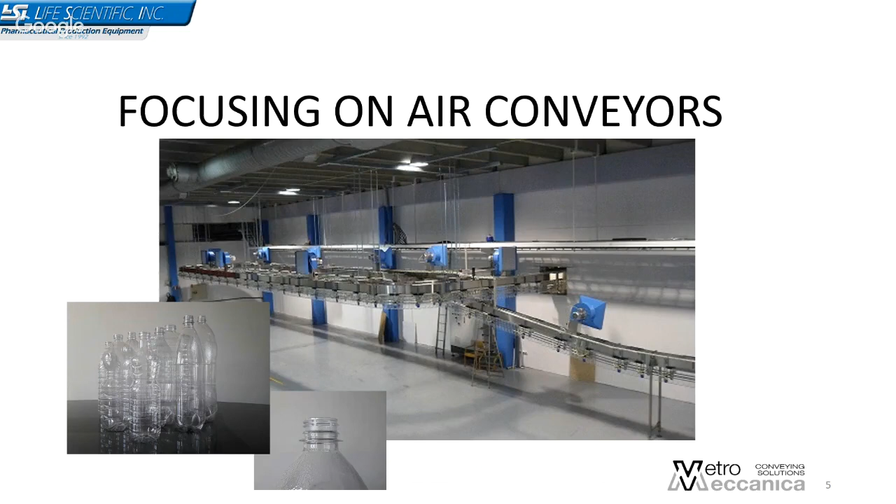Second slides are examples of the air conveyors. On the left, you will see these big curves. This allows bottles to go up and down with different levels in a building, for example.

And our air conveyors are completely made in stainless steel. They are very rugged construction, and we have a flexible modular design. This means that we can adapt our air conveyor to your requirements, to your needs, and to your building.

And we developed during our years a special system with every repeated section and module, every time customized, but ready to be customized in our stock. That means that the main frame of the air conveyor is already built in our store magazine, and we can customize the air conveyor with the bottle we have to run.

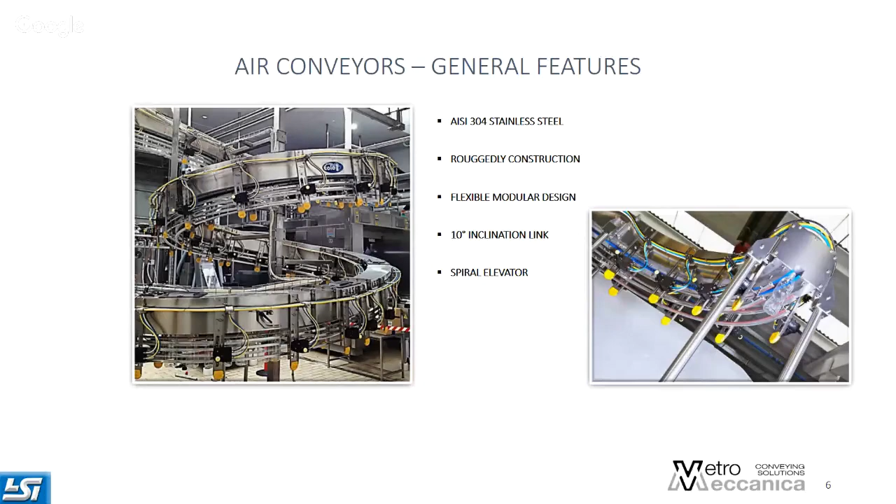Second slide. Okay. Apart from the hardware of the air conveyor, our main feature is the software we install on the air conveyors. We developed this software during the years. We modified, we upgraded, we did as much as we can to help conveying bottles very weak and very light.

As stated, it continuously checks the air conveyor functioning, and thanks to the bottle sensor, it assures a full control of bottle status: missing, moving, and accumulating. Because one of the main scopes of the air conveyor is connecting the blow molder with the filler. But the second and most important feature is creating buffer and creating accumulation.

That means that we calculate the exact length of the air conveyor in order not to stop the blow molder machine. So the air conveyor will be long enough to have the right buffer between blow molder and filler, to empty the oven of the blow molder and to have a minimum accumulation to give the complete line the right efficiency.

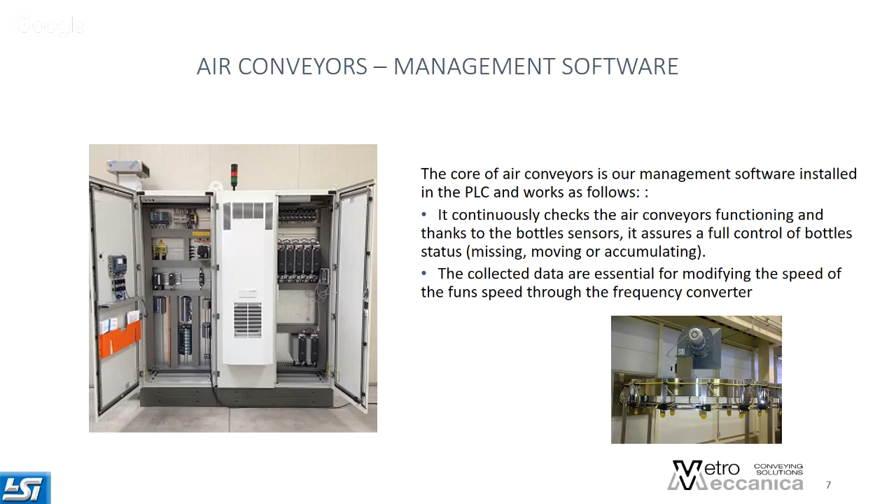This means that on the air conveyor, we have this blower fan that pushes air inside what we call the omega channel, but inside the electrical control cabinet, we have these frequency converters that can modulate the speed of the blower fans in order to increase the speed when we need to increase the speed, and to decrease the speed when we are, for example, in a static situation.

Key points: adaptive speed, as I told you. We have different conditions in an air conveyor line, so we should adapt our speed to the different conditions of the line. During the years, we have also developed this low pressure logic. It's included in our standard software because we are able to use this low pressure logic in order to avoid shock among bottles and to spare energy also.

For example, we have static situations during production, and with our photo cells on the line, we are able to freeze the situation. It means that if the blow molder machine or the filler machine are stopped for any reason, we are able in a couple of minutes to freeze the air conveyor situation and to stop all the fans in order to spare energy.

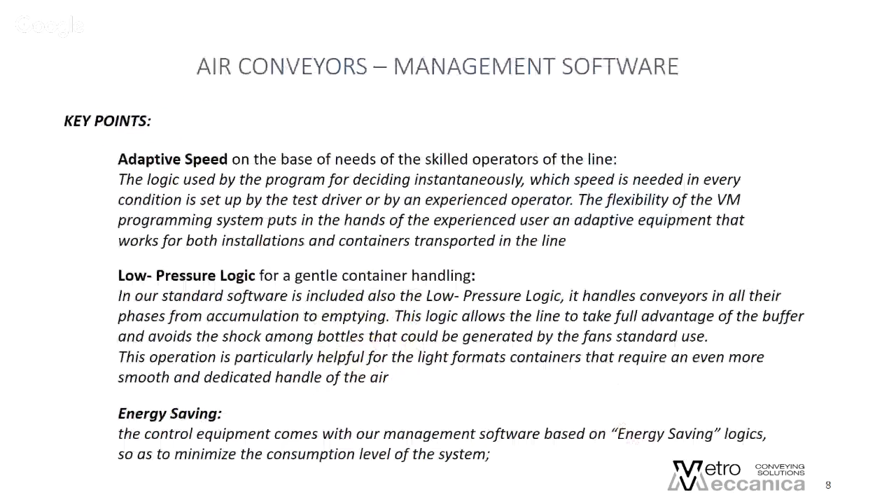Body guide. As I told you, we can run on the air conveyor different bottle formats, small ones, big ones. We need body guides, and we need to adjust these body guides. You can do this adjustment in different ways. We can have a manual adjustment, but it's not so frequent.

We can have a pneumatic adjustment with simple cylinders, and we can have this EMD, Eolo Moving Device, which is patented by Vetromeccanica, which allows infinite positions on the air conveyor system.

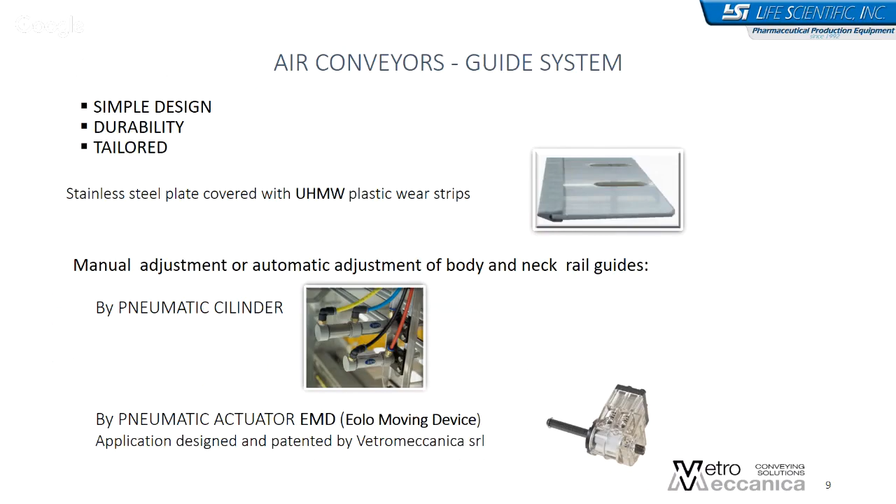You can see in the pictures, in the larger picture on the right, our system. This is specifically developed for the air conveyor. It's patented, and it's mechanical and pneumatic. This means that it's very simple with a very low energy consumption, because it works like a cylinder. Our competitors on the market, to do the same thing, utilize an electric actuator. But electric means using energy, power, and it's very delicate, because as you can imagine, in

for example, a filling company, you have very bad environmental conditions. You have a wet area, for example. You can have sugar, you can have steam. Our EMD can always work because it's plastic and because it works with pneumatics and with air only. We don't need any circuit, any electricity. So it's very, very rigid and robust.

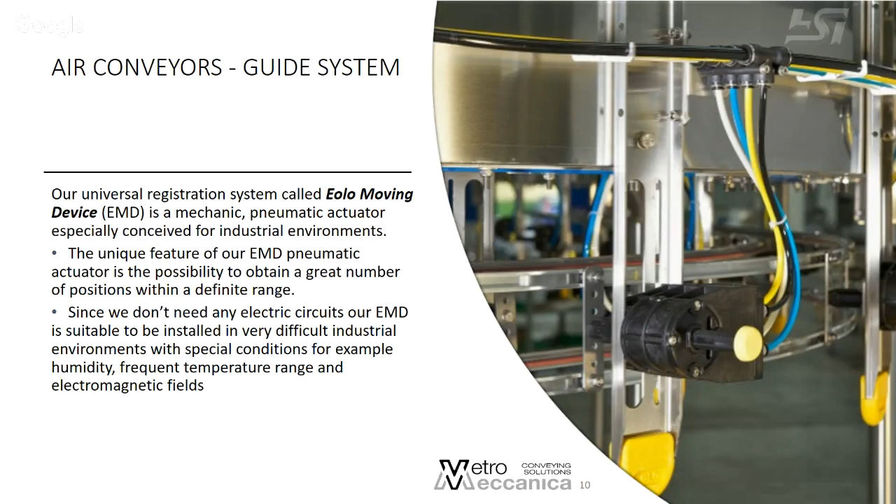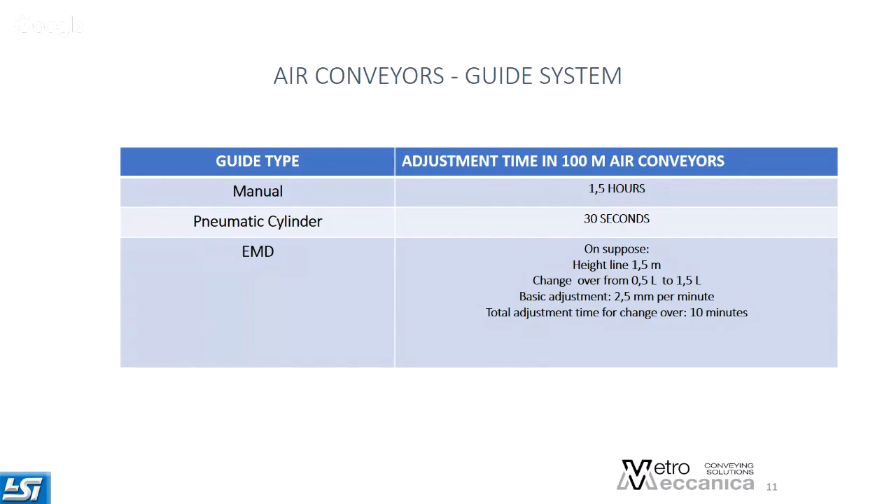On the air conveyor, we use air to move bottles. This means that the air inside the omega channel should be filtered. We have different levels of filtration system. The standard level is a G4, which is very, very common and very used on the market. For the second level, we have this two-stage filtration system. This is used, for example, for milk or for juice.

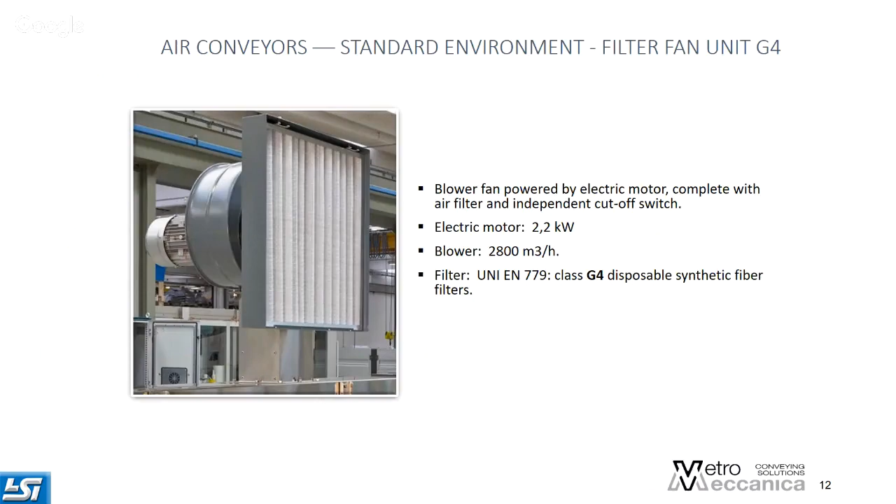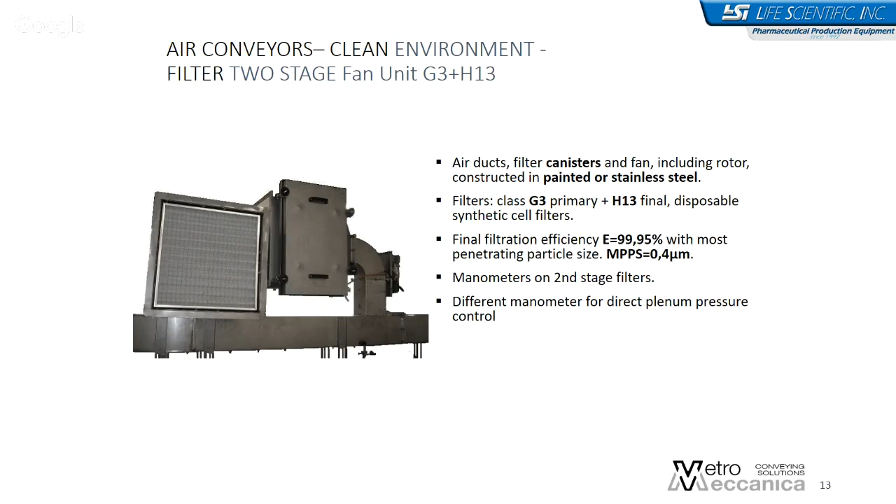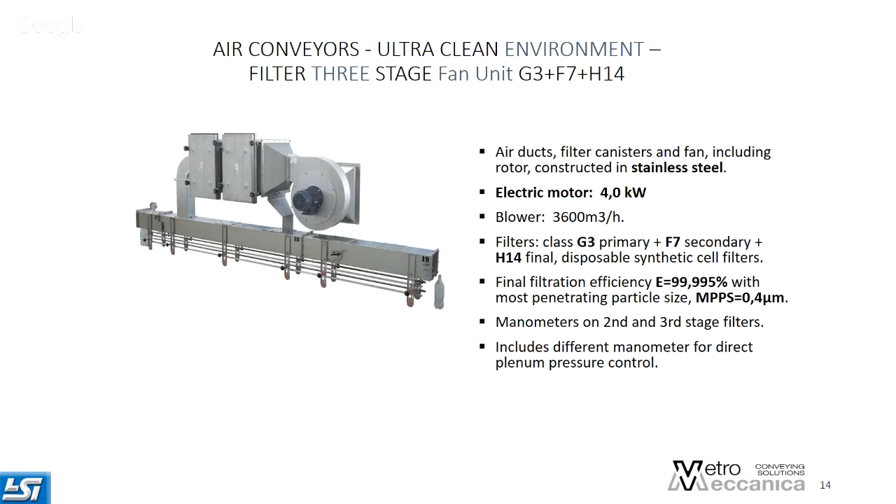Thank you, Daniela. Stefano Lodi, the manager and business developer of Vetromeccanica, will be visiting the United States, going on a roadshow with us throughout the Midwest the week of May 14th. So if anybody is interested in seeing this machinery in operation, please get in touch with our representatives.